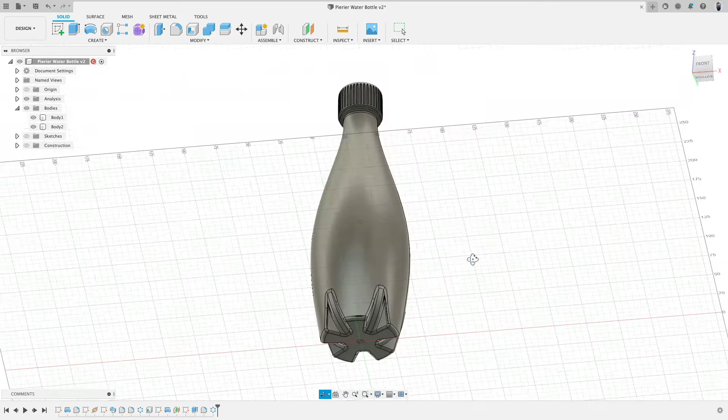So in this video, I will show you how we can create very nice smooth surfaces with the spline tool. And we will use this water bottle as an example. We will also take a look into how to create more details via the circular pattern tool.

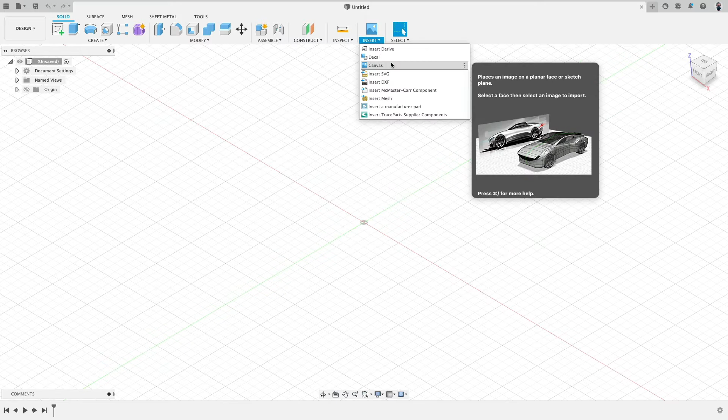Okay, so very good. Let's start with a new file. The first step will be to bring in the scan model. Normally you would go to File, Import, and we don't actually have an import function here. So to import an external CAD model, we actually have to go to the Insert command. Actually makes sense because we have Insert for Canvas, insert two-dimensional drawings, so why not the mesh model? Click it. Very good. Then you navigate to where you have the file and click Open.

The next step is very important. This model was adjusted in Blender, which is my go-to polygon modeler. And Blender internally works in meters. So the unit type when we bring this in should be meter. So then the scale is 1:1 and correct. Okay, very good. So there it is. Our document is also set to millimeters.

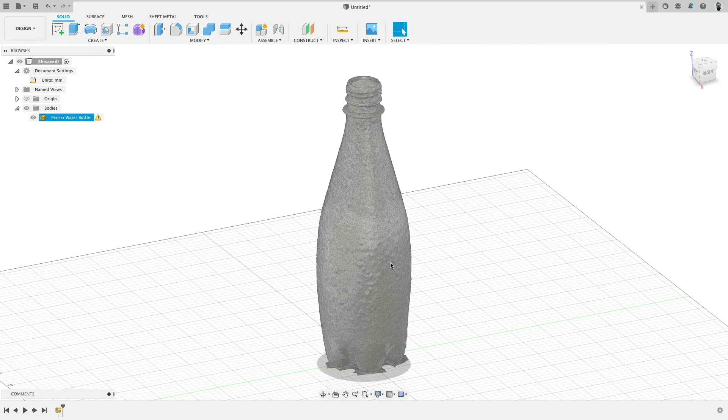If we now rotate around, we can see here there are some dents, some bumps actually on the surface. That is actually cornstarch. I used cornstarch to make this transparent body more opaque, and then used Meshroom to do the photogrammetry to create this model. I rotated it and positioned it so from the front view we have a nice left and right view.

Okay, so how do we start? First, we would like to make this bottle more transparent. So right click onto the mesh body, opacity control 10%. That is good. Now we can actually see through it. As always, we want to start working on the easy parts. This curve is more complex, but here we have a few linear elements: the center, the bottom, the neck.

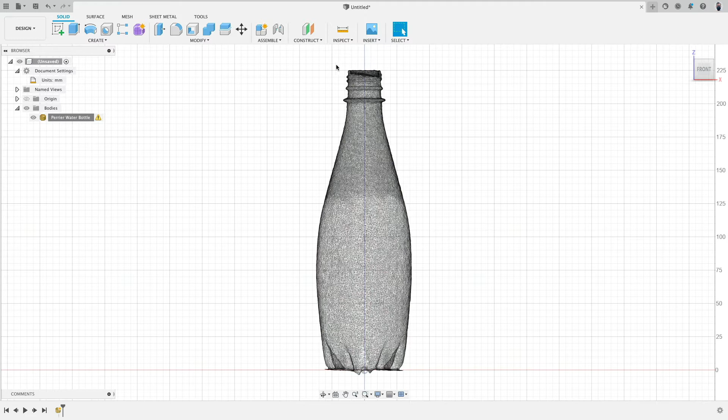So let's do that. Sketch on this plane, line command. I start somewhere here, go over, and then I go here to the ground point, click and go this way. I on purpose make these lines crooked just to show you how the constraint system works to straighten everything up. Horizontal constraint for this, vertical constraint for this. Here we have a perpendicular constraint. I will delete this and replace it with a horizontal constraint.

Dimension wise, now this curve will come down, and then here at the bottom it's rounded. So this line has to be a little bit longer, maybe like this. Let's add a dimension by pressing the D key or going to sketch dimension. 30 is good. This length here, I know it's 225.

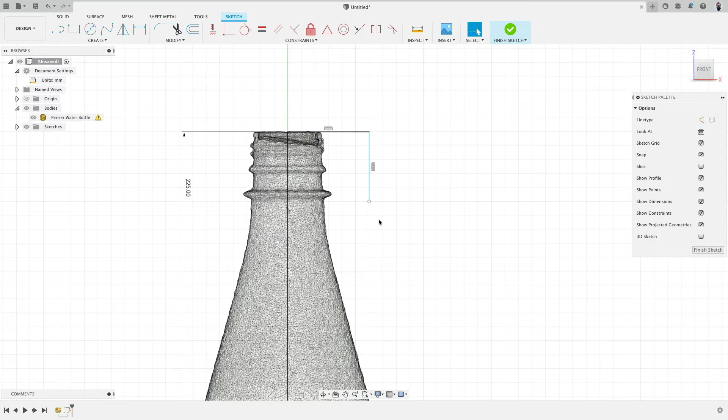And now we can select this point and drag it around and see where this would look good. Maybe here. This feels good based on the scan. Maybe a little bit of tidy up. 12.5. What's the length here? 25. Very good. So now we actually have this part done.

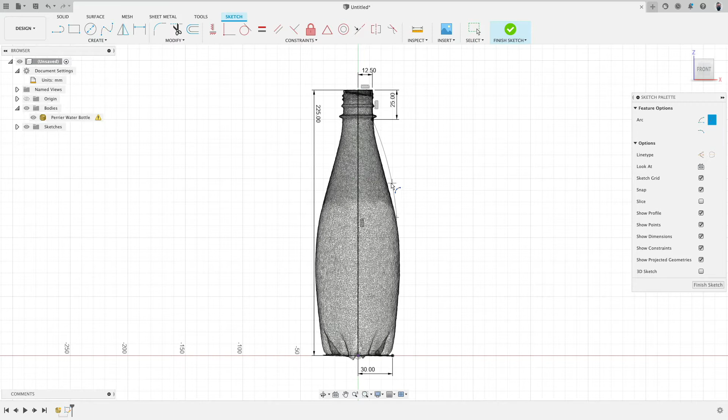Now we can take a look at how we do the curve. There are actually three ways. We could work with many arcs and try to model this till it actually fits. Please don't do this. I'm just making a small quick demo. And you can see, now with 2 arcs, it doesn't really work. I might need more arcs, and I'm really limited to the shape of arcs.

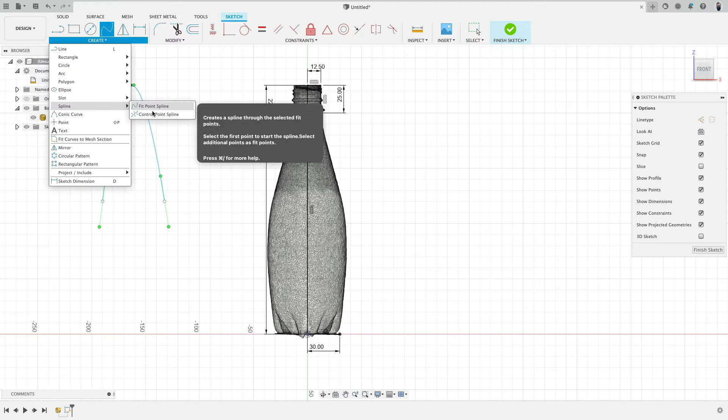So, welcome to splines. We have 2 types, fit point and control point. Let me go over the difference again. With fit point, the curve runs through the points, and with control point, it starts at the first and ends at the last point, and then is inside. By moving this together, I can pinch the curve, and here I have handles which I can use to change the flow.

And they are pretty much 90% the same, with tiny differences in their application. So here, it doesn't matter which one we use. I will show you how to use each one. It's quite interesting. Now, when we take a look at the curve, this is nice and fluid: a little bit linear, bend, a little bit linear. One of the main rules is we want to use the least amount of points. Little demo again. You see how nice and smooth this actually is. I can probably create the same with more points.

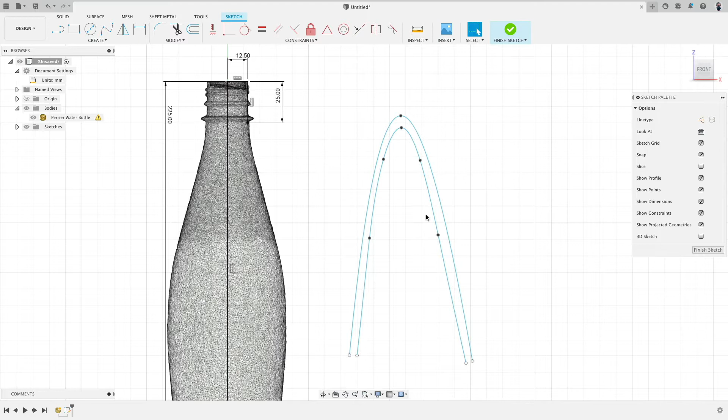And after quite some time trying to clean this up. Now for our eye, maybe they look equal. But check this out, right click Curvature Control. Right click Curvature Control. And I will move the whole curve actually to the right.

So you see when I select this point and move it around or select the handle, this red line is nice and smooth. You see now here, it changes the flow a lot. So when I want to get exactly the same shape like on the right side, you see how much work that is, trying to position all these points.

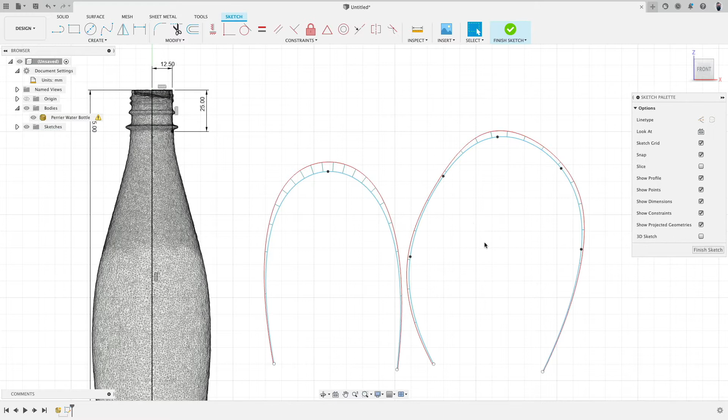That's a good example to show you why it's not good to have many points. It's simply more work to create a perfect flow. When I say perfect flow, for example, here we can see that the surface or the curve changes the direction and gets a little bit flat. But here it's a nice continuous bend.

I always find it very easy to imagine these fit point curves as a piece of plastic, a stick, and we bend it over points. And the plastic always wants to straighten itself. So, fit point curve. We will start at the beginning. Now we need to figure out how many points we need. I will go first actually with 2. And then at the end, click OK.

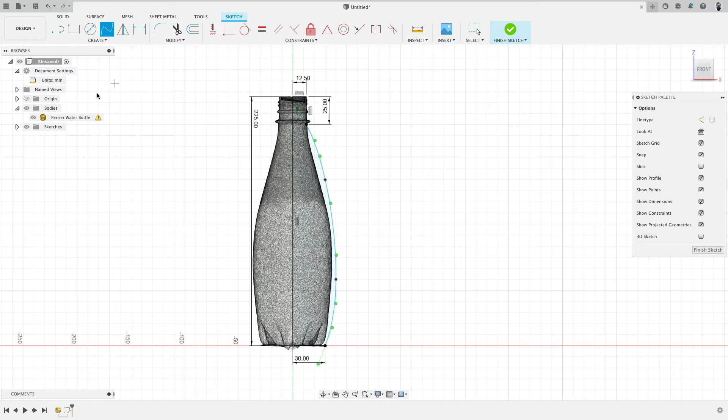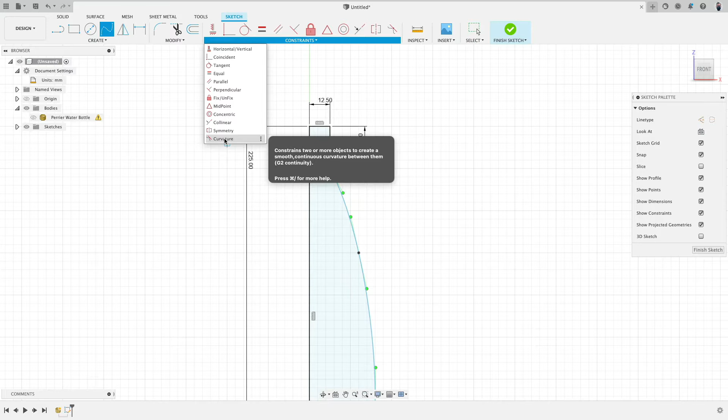So let's hide the water bottle. Down here, this is good how it starts, but up here, I want the curve to flow smoothly into the line. So we have here, it's called curvature. Some programs call this smooth. They also call this create a smooth continuous curvature, or some just simply call it a G2 transition. What G1, G2 means, I will explain in a moment. So this is better than tangent, but a little bit more complicated to use.

Curvature, click, click, and there we are. You see now this basically pulled this handle, so this is aligned and the curve flows perfectly to there. Okay, so escape, so we are not adding any more constraint. And now we can see, when we move these points around, what can we do here? Maybe there. See, push and pull a little bit. This handle maybe a little bit further down.

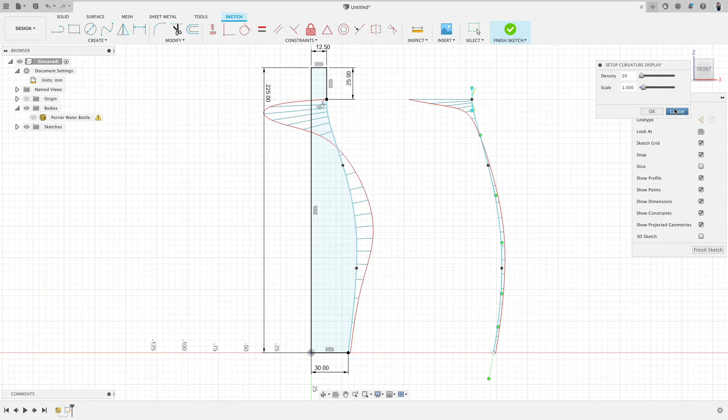When you press the M key, it's actually a lot easier to move these points than by click and drag. Okay, good. So now with this done, let's right click and take a look at the curvature. I will copy and paste and move this curve to the right side, simply so I have a copy. And then here I will turn on the curvature control. Actually, I will cancel this for the moment. And this one, I will turn the curvature control off for the moment.

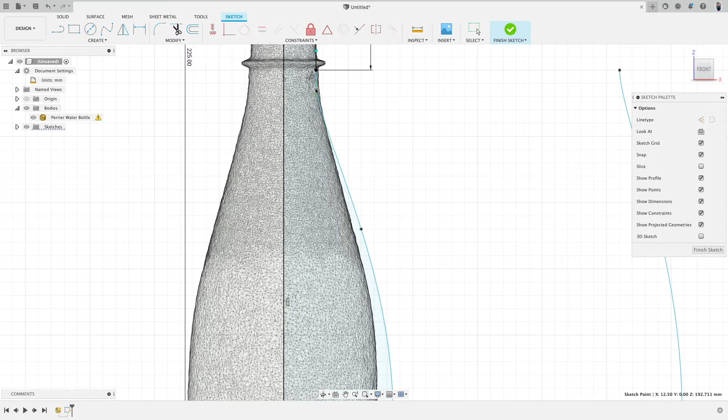So it's easier to see the curve. And now I will delete this point. This goes back to the least amount of points possible, just less work. Let's turn this back on. Okay, so where do we have to put this point? Maybe here. And this one here, maybe a little bit up. I just pressed escape and that stopped the transformation of that point. Yeah, that doesn't look too bad.

So let's take a look at this curvature now. You see how this is a really nice flow. In here where we have multiple points, this changes the flow too much. You see this is very even, and here this is not even. Because just one point.

Goodie. So let's turn this off for the moment, and let's see how close we are. Up here we're a little bit shorter inwards, that's fine. Here maybe we move this a little bit, but then we're not really hitting it there. And here we are off. So we could insert a point, but then we end up back at the problem of too many points. What else can we do?

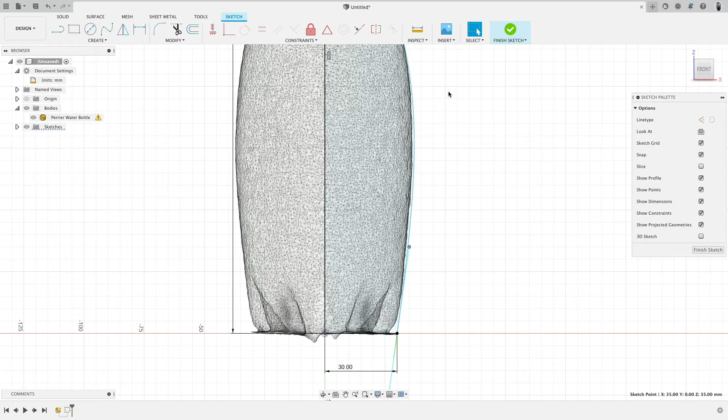When we click this point, we have a handle here. With the handle, I can change the flow. When I make the handle short, I get a small rounded corner. You see there's also a green ring, and if I make this bigger, I kind of straighten that line a little bit more. And maybe like this. And you see this is actually more parallel. This looks all pretty good.

Yeah, here it flows through that curve anyway, through that point. There. Yeah, that's actually pretty nice. So let's take a look at the curvature one more time. So there we are. Okay, goodie.

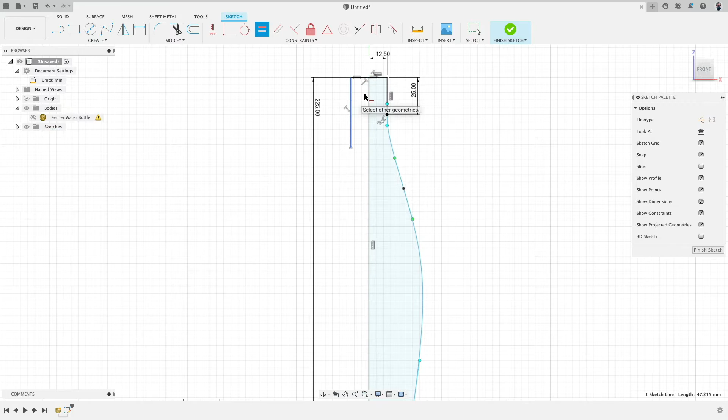I'm going to show you now how we can build this via the CV curve so you can see the opposite. So here I just make two lines, okay, and then I say equal, equal, equal, equal, okay, and I also down here need to make this equal to here. Very good. And then this dimension I push over.

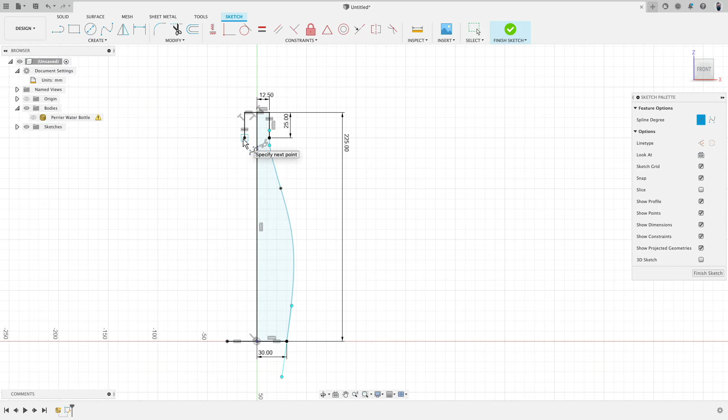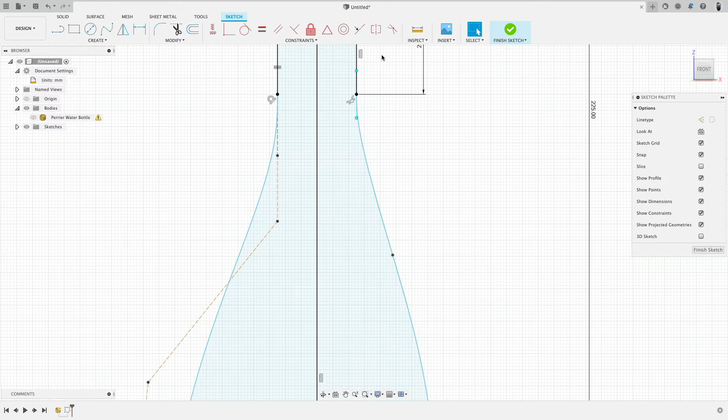Okay. You notice the moment we add this curvature constraint, these two lines will become black. And if I undo this and just do the tangent, only this one line. So what this means is actually that this G2 command, G1, G2, works with these 2 points. So these 2 points are perfectly aligned to this line. You see, they are actually at a line. I will go more into this just in a moment.

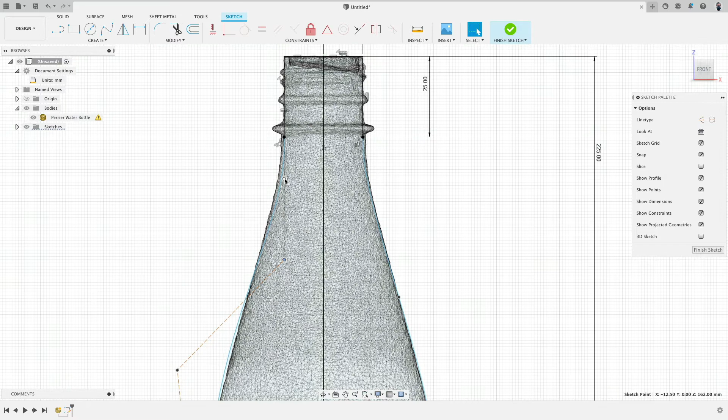Okay, so now we can actually turn on the bottle, and then let's work on how do we push and pull everything here. There we are. Maybe here, maybe a little bit there, and there. So you see here we work without handles, but we simply position the points till we get kind of like the flow we want. Okay, very good.

And what is really important here with the CV curve to know is when we place the CV points, the moment points are closer together, they start pinching, and the more points are away, they're stretching a curve. And ideally, we want also to have them in even distances, which in this case is a little bit more tricky, but the curvature graph here is fine. What this means is the curve starts bending, and then here's an inflection point because the curve changes direction, which is why the graph goes that way. Okay, now this looks actually pretty nice.

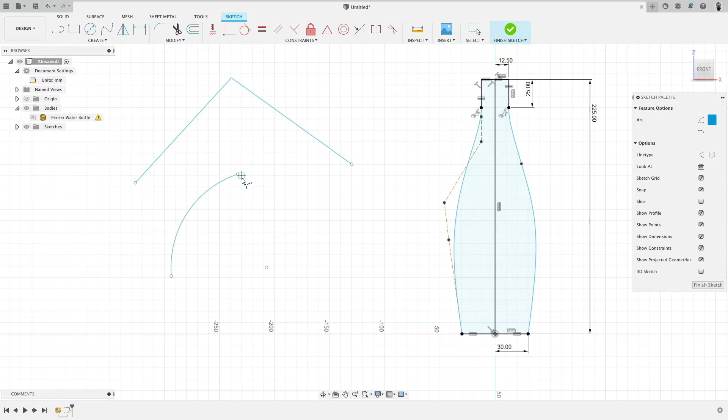So before we continue, let's actually take a look at the difference between curvature and tangent. And again, tangent is G1 and curvature is G2. By the way, coincident is G0. Maybe let's start with coincident. Click, click, click, there. So this is what's called G0 or coincident. There's no flow. Basically, two elements meet at one point very sharply. And the same can also be done with an arc. There and there. You see? Just a sharp point. Okay, so that is G0.

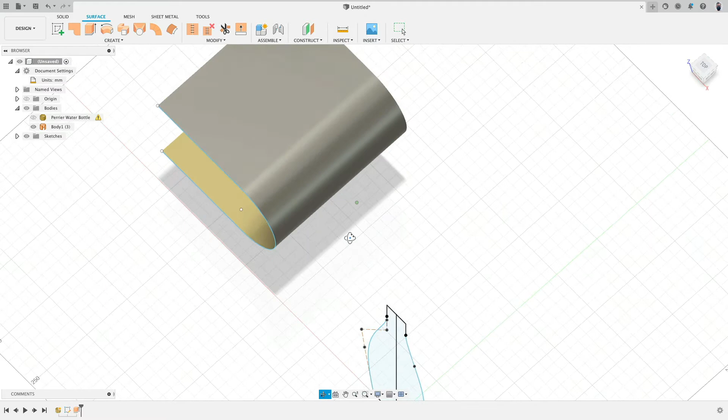Now, G1 tangent. Let's take a look at this. I draw a line and I make an arc and I draw a line. Beautiful. The arc flows tangent into the line, flows tangent into the arc. Okay. Now let's take a look how the surface visually looks when we add lights to it. So let's go to shaded, and there you can see the face is highlighted, and then very instantly the arc gets this highlight, and you can see there is kind of like an edge right there. And that is basically what G1 is. It's a more geometrically perfect transition because it's line and arc, but it visually is just not very appealing.

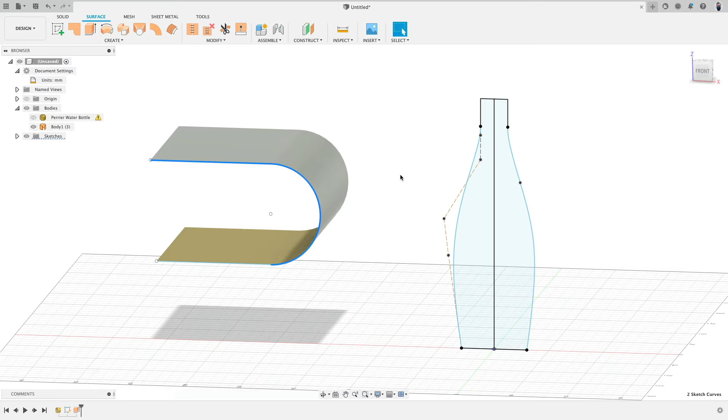Okay, let's go back to the sketch. I will create a line like this, and then I will lock this line on purpose so it doesn't move and it's not horizontal. Perfect. So now I go with the fit point, the CV curve. Again, this is G0, and let's create a transition. Wrong command. There. Now we can see even better how the highlight doesn't even flow because it is a sharp edge.

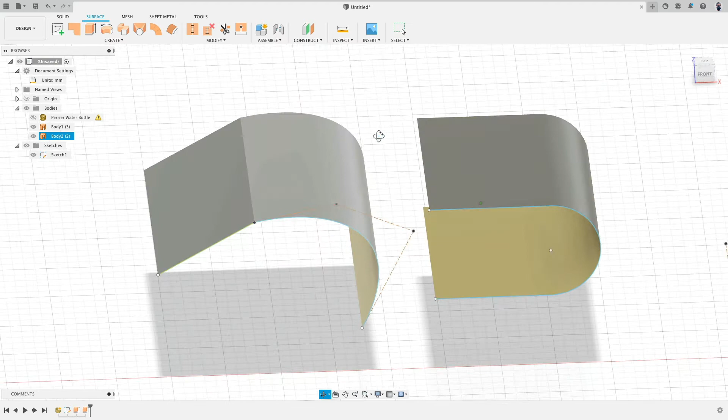Okay. Now when we go back to here and say these two, make tangent. So G1, and pay attention to what happens to this point. You see now that this point got adjusted so it flows to this line.

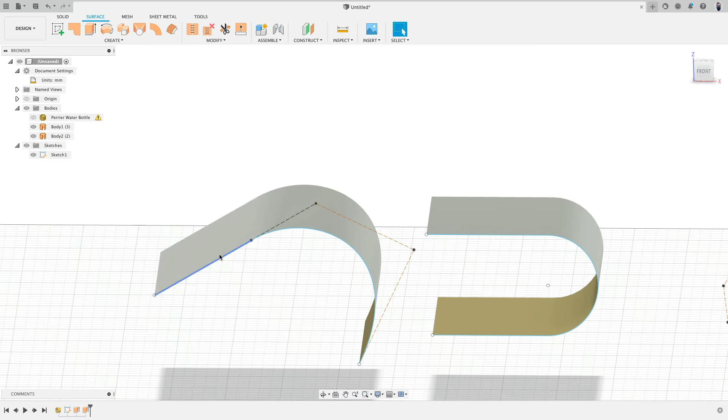There, this looks better, but here we can still see this very quick transition from the big highlight of the surface to the highlight on that arced surface. So we kind of have the same here; while this is not an arc, how this curve flows to here is the same, G1. And essentially what happened is we have this line, and then at this point, instantly this curve starts to bend.

Now we will delete this and we go to curvature. Pay attention to what happens to this point, G2. So G0, G1, G2. You see now this line is parallel also to here. And if we compare how this tangent result looks like, you see from here instantly it bends. Now we can see that the curve actually continues the direction of the line a little bit and then starts to bend.

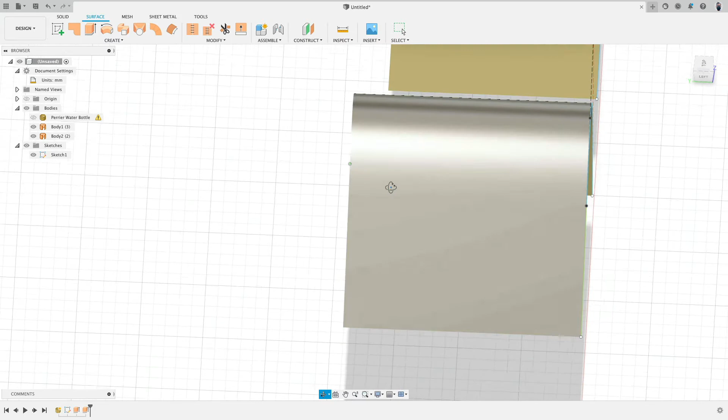Whoa, where's that edge? We don't see it. And that is what G2 is about. And then you also have G3 and G4 and G5. That's more stuff for car designers, but for us, G2 is actually very sufficient. Very good. So here this is a line, and thus these two segments are in a line, or these points are at a line like this.

Let's go back one more time, and I will make something like this, number one. And then, whoops, 1, 2, and 3. Very good. And I will lock these points so they don't move. And I will go G1. You see where this point is, undo. And then G2. You see that this point is actually not in a line anymore. And that is okay. When we move this, you see how the second point moves.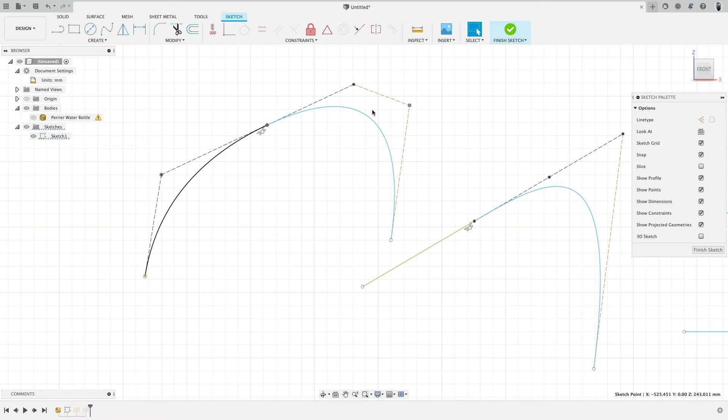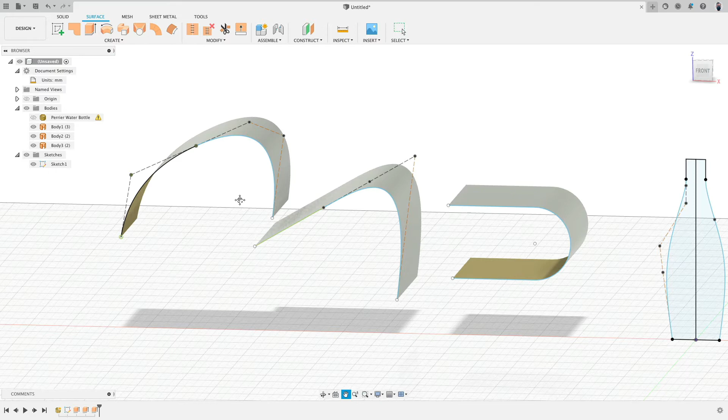So what's happening is this curve has a direction. And with G2 or G1, these points are positioned so that the curve that comes out of it somewhat continues that flow. So when we add also here this, yeah, good luck finding the transition. We don't, because it's perfectly blended. Okay, and that in a nutshell is the difference between G1 and G2. Again, G1 is also faster. G2, while better, is also slower to calculate.

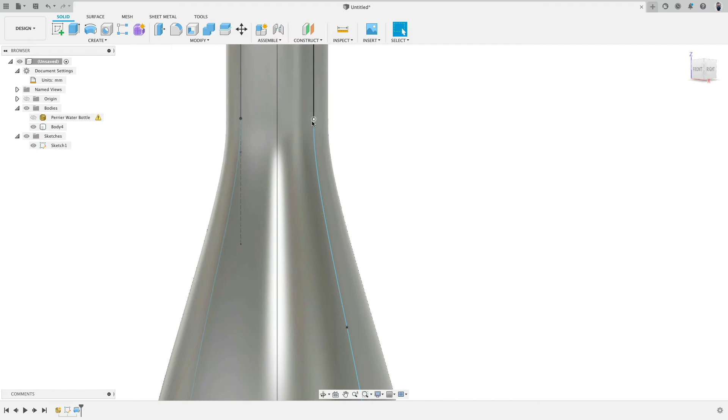So let me delete all this. This is all good. Perfect. Now we can go ahead and create our first body. So let's go to revolve. We'll use this one along here. Very good. Also there, the transition and the highlights are really beautiful. When we zoom in, there's the edge, but we can't see any transition. And that's because this is set to G2. So with the scan model, when we zoom in, we can see there are a few more elements. So we built the main body. Now we can start adding details.

So I will go top down into the sketch. Here's the line command, click, click, click. I do this in a very simplistic way, and then we will push everything into the format. Go to control point spline. Click, click, and then drag this one out. So these are angled because these lines we can also make horizontal and vertical. It's actually pretty cool. And then this line I can drag a little bit higher.

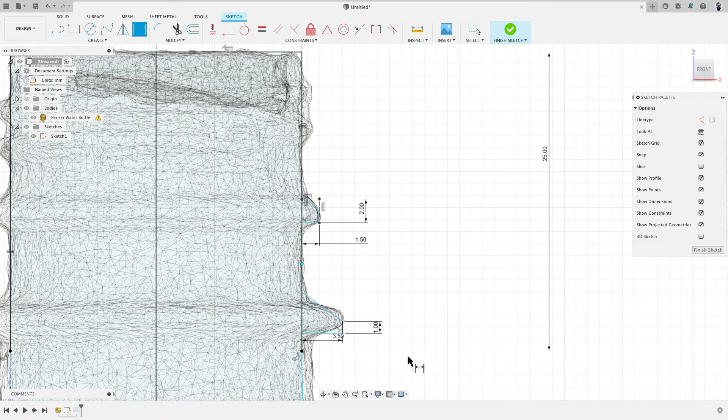So D, what's this dimension? Maybe 1.5. Here, let's say 2. This one we make 1. 3.5 is fine. Now here we could specify an angle, or actually distance from here to here. That would specify the angle of the line. So this line to this point. You have to be careful what you click. And I would like this to be 3.5 millimeters. Very good. From here to there, 1.5.

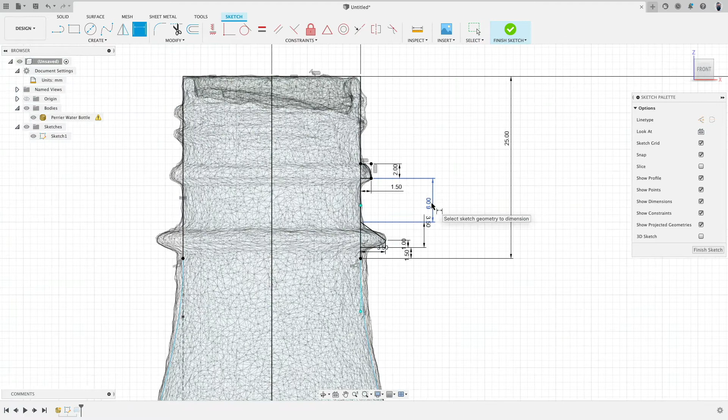And what distance do we have here? 5.5, 6. Let's say 6. Okay, very good. Now, you see we added these extra elements to the sketch, but this is not showing up. So that's a cool part about how we can edit features. Then we click, and on the PC it's Control, on the Mac the Command key, to add more selections or profiles to it. You see I'm deselecting and adding this back. Click OK. Cool.

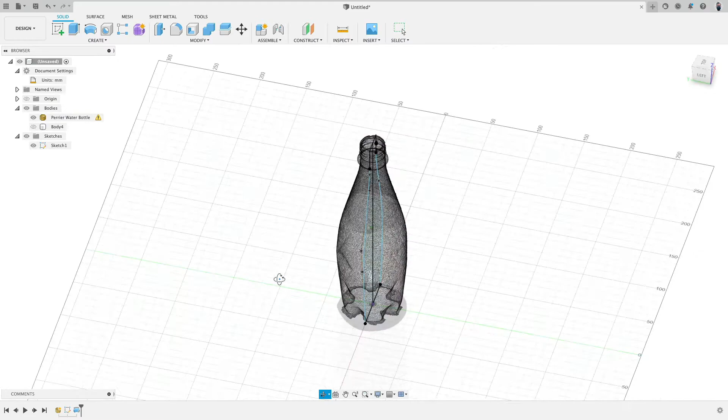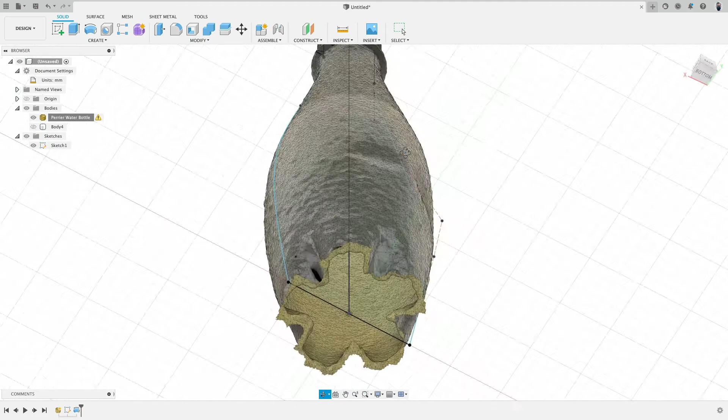At one point we have to hollow this out, but this bottle has these interesting elements down there. So let's take a look at that first. For this, we will go to the model and make it 100% opaque again. And then from the bottom, we need to see where is a good area we could use as a reference. This is back here, so kind of like there. So we go to a right view, then inspect, section analysis, this plane. Very good. So there we can see half of the model right at that position. And let's make a new sketch along this view.

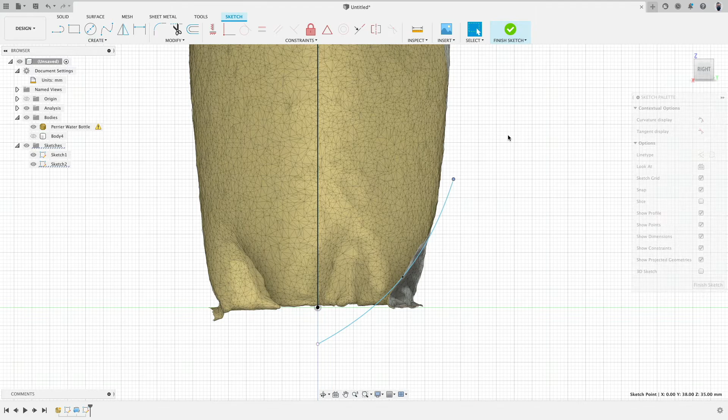Fit point is actually in this case fine. Here, click maybe there. The way this lower area was scanned is not 100% accurate. So this is fine. We just need to get something that's close, kind of like this. Okay, very good. So we specified, and we can turn the section view off. We specified this path. Okay.

Now I need to create the tool that cuts that groove. And for that, I need to have a sketch that I can position onto this line. And like a roller coaster, I want then to run it across here. So we go to construction and let's take a look. There is actually a command plane along path. That's exactly what I want. So click, then I bring it down maybe to here, click OK.

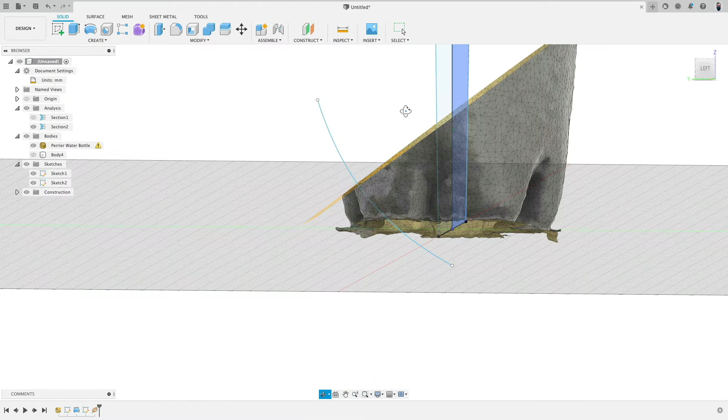And what's really nice is I could go now to inspect, section analysis, click this plane, click OK. And then you can see at this angle, we can look into there. Pretty nice. Back to create a sketch on this plane, because now you can see the sketch we will create is actually kind of having this angle into the body, but it is perpendicular to this center rail.

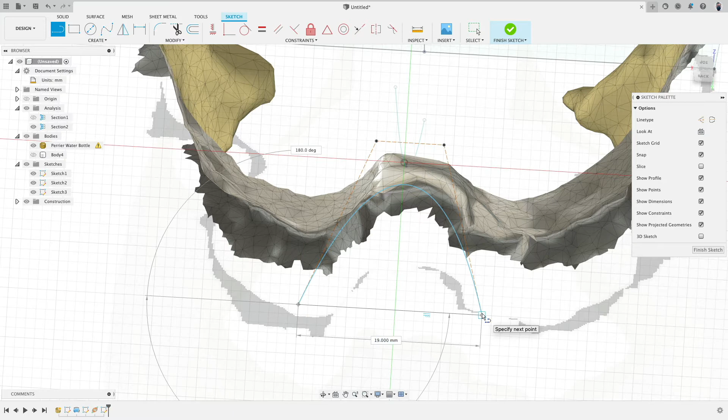And we can use the control point. So I will maybe zoom in a little bit and then click, click, fill this with a line. Okay, and here's now a little trick. I will, ideally on the grid, or actually here, draw a line down, make this horizontal, and then this point I want to be aligned with there. So you see now this is centered.

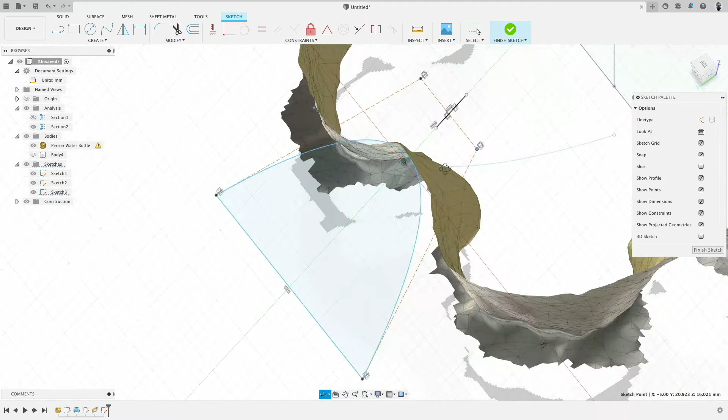This is very important because now, escape, I can select symmetry and say this point to this point, symmetrical to this line, and you symmetrical to there. Very good. Now I can freely just model on one point and you see the other one follows it. Pretty easy. Again, the scan is not perfect, so we just eyeball it. All these exercises we do right now are not made to build something for NASA, but more to understand how this process of modeling works.

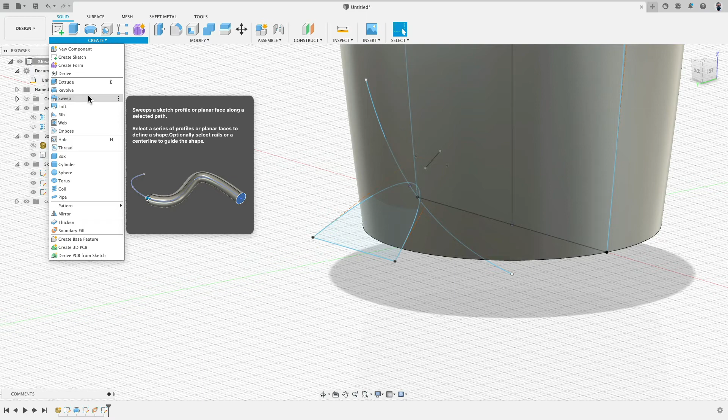So this actually feels pretty good. Then we can turn off this section view. We can turn off this mesh, show our body, and now we will go to create and sweep. Sweep does actually select one profile, the one we created, and sweeps it along a path. You along this path. There we are. Sweet.

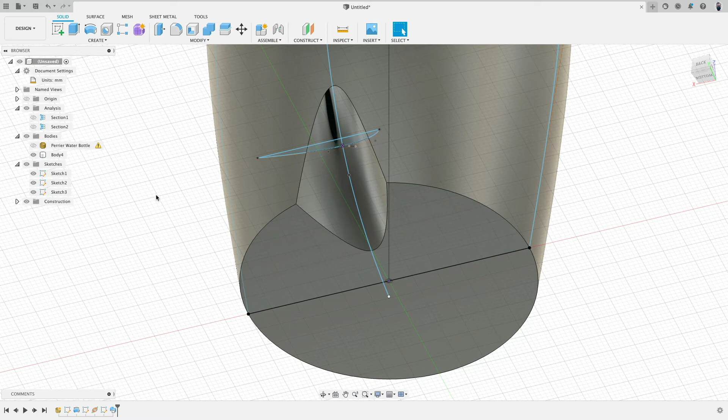Okay. So the nice thing is, again, because this is all timeline based, when we move this point up, undo, you see how everything updates. Beautiful. Very nice. So the next step we're going to do will actually be very interesting for you to see the power of the timeline and how we are going to move features forward and backwards. So now I would like to visualize how this cut works when we make a pattern.

Oh, I do not really like this line here. So why do we have this line? That's because there's a sketch. So we'll do the following: right click, edit feature, and then I just move this to the end. And then from there it starts cutting. Yeah, 10 times better. Cleaner surface, always desirable. To make the pattern, circular array, face along this axis, and okay.

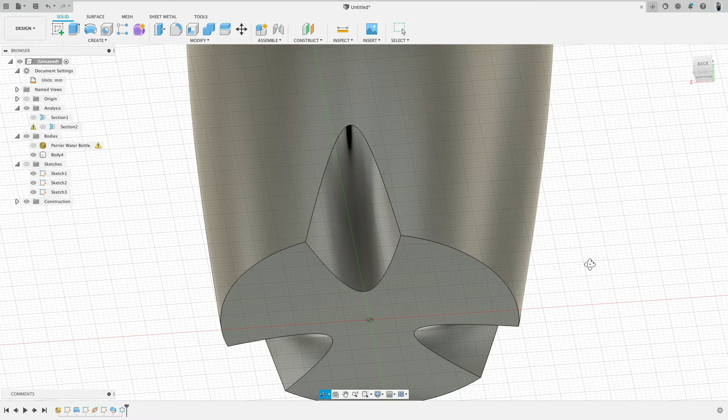Okay, why did this work? I assumed this is not going to work. Interesting. Oh, I got fusioned. Interesting that it did that. I did not know that this actually works. Okay.

Good. So with face, you can make a pattern of a face. With body, obviously you make a pattern of a body. And with feature, that's actually the one I wanted to show you. We now click on this command. That's the feature. And then quantity 5 and okay. There we are.

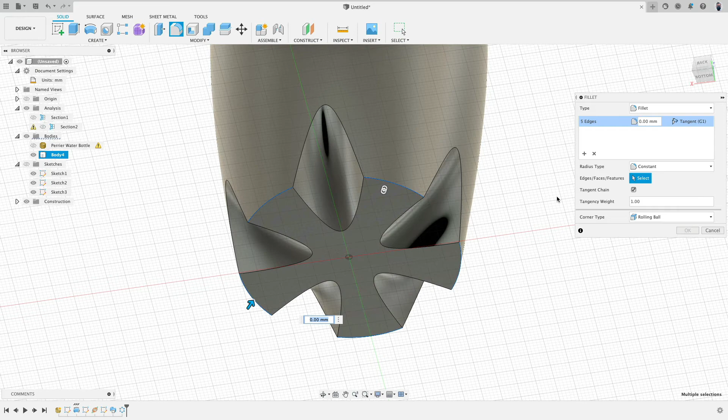Now I would like to round this edge. So you, and you. This looks actually really good. I can round those, maybe 5 millimeters. And then I can go ahead and round all those. And maybe 1, let's see, 2. Because this is a constant radius, you see here how this gets smaller. If we go with chord, this will look visually better. Okay, nice. Good.

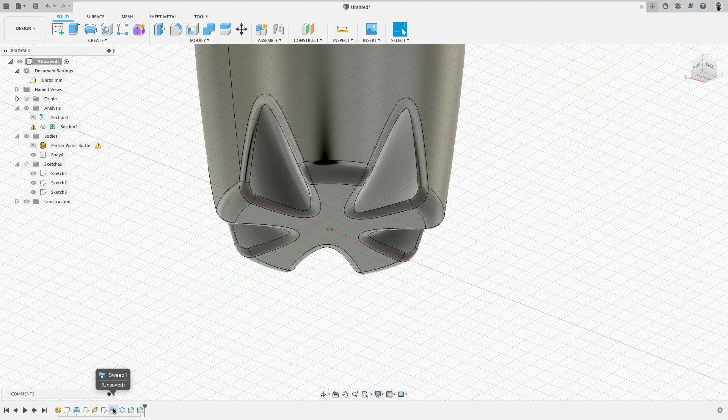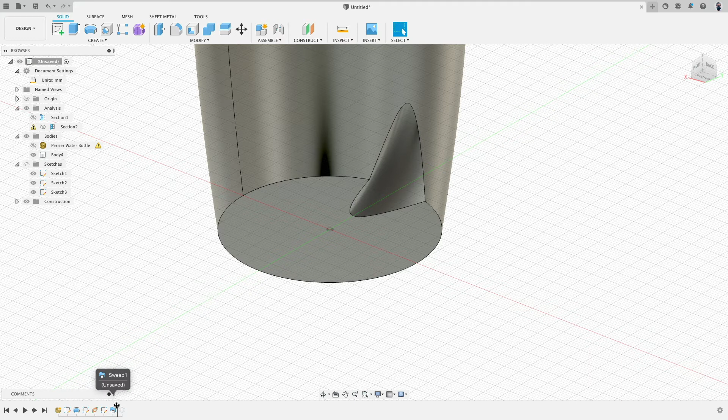Talking about the timeline and how we can move features around. So you saw how I did this pattern and then I started adding these features to it. And maybe I don't want to have to select 5 edges. I just want to select 1 edge. So that means this rounding I need to do before I do the pattern and actually before I even do this cut. And to be more clean, maybe I should do this even before I start modeling on this part. So now there, I will actually give this a rounding at the bottom.

You see how I moved the time marker to the position where I wanted that to do, and everything else should work perfectly. You see, there, now I have this edge already. Because now I can go ahead and say chord length, yeah, that is good. Round, very nice.

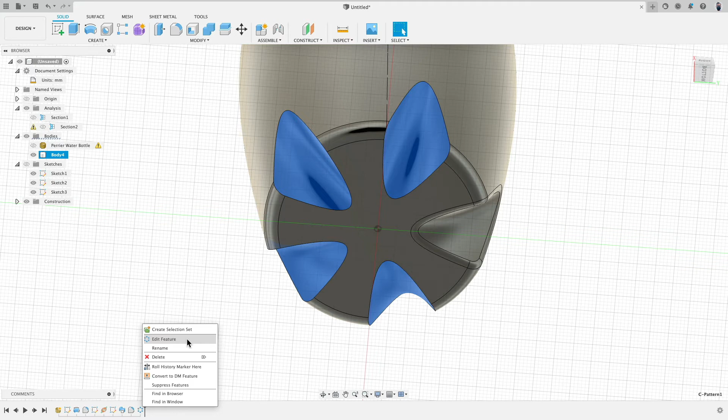Feature pattern, okay. Double click, right click, edit. And then for the features, I also, with Control or Apple key, add this one to it. There we are. Pretty cool, no? So you see how useful the timeline is to restructure our approach to the design. And also at the beginning, we made the bottle and then we went back into adjusting the sketch to add all these elements. And then we edited the revolve feature. Pretty cool.

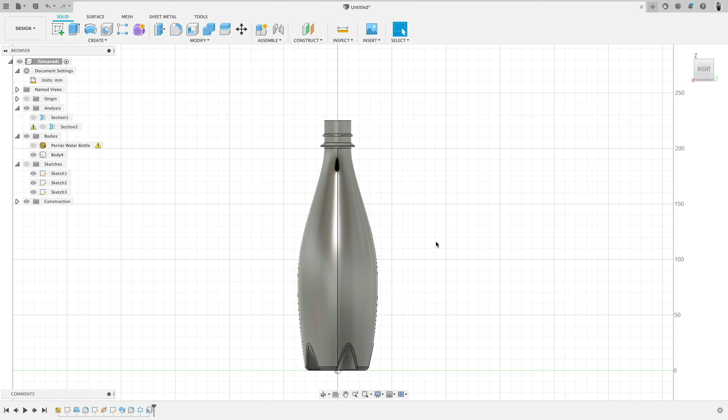Now at this point, we can actually look into doing a shell command. 1 millimeter. This is probably not going to work well, and you will see just in a moment why. So let's do a section analysis from this view. Okay. Well, what's he talking about? This is all pretty good. Let's go up. Oh, what's here? We have cavities. Yeah, that's not good. So how could we fix this?

We could make this shell command simply thicker, 2 millimeters. And we get an error warning? Yeah, there was an error warning. Okay, maybe 1.5. Let's see. Shell, by the way, big warning, is a very tricky command because it is a very complicated task to offset the exterior surfaces into a shelled inside surface. So here we have some problems, so we can't even do this.

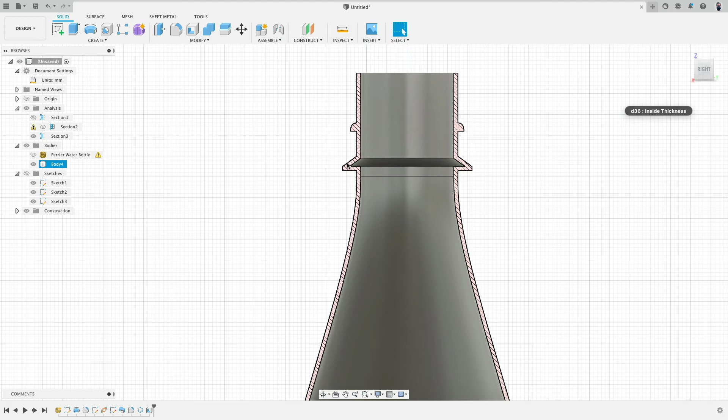And I want to maintain having actually here this being filled. So what can I do here? Okay, so this area gets shelled. To prevent it being shelled, I simply have to go back to here, edit feature. I will actually turn the section off, show my sketch. Here, hold the Apple command or control key, and to be clean, I deselect these two elements. Okay. Do the shelling. There we are.

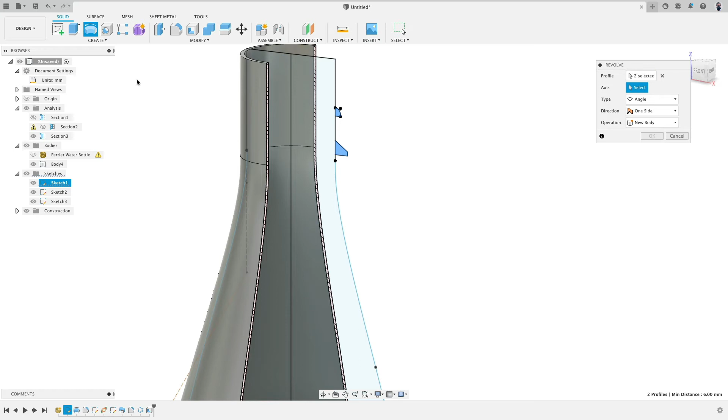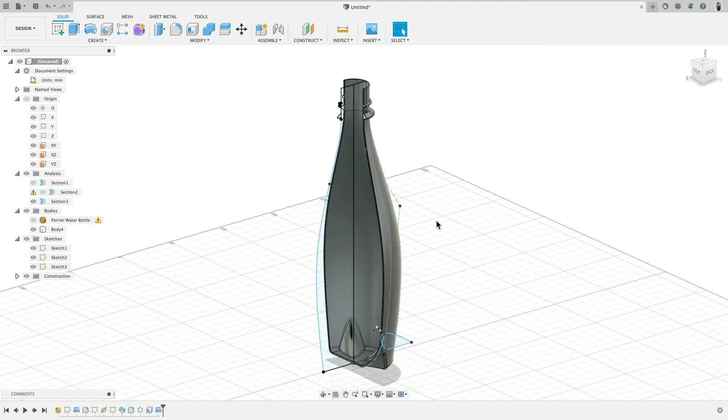You see? Pretty cool. And now after we did the shelling, I'm going to add these two bodies back into our design. I'm using this Z-axis here. Join. Cool. Okay, so you see how we brought these pieces back to the end. This is really why I like the timeline a lot, because it is a very easy tool to visualize how we build everything, and then we move features or steps forward and backwards. Because when you explore design, you have an idea, but definitely there will be times where you have to adjust your idea.

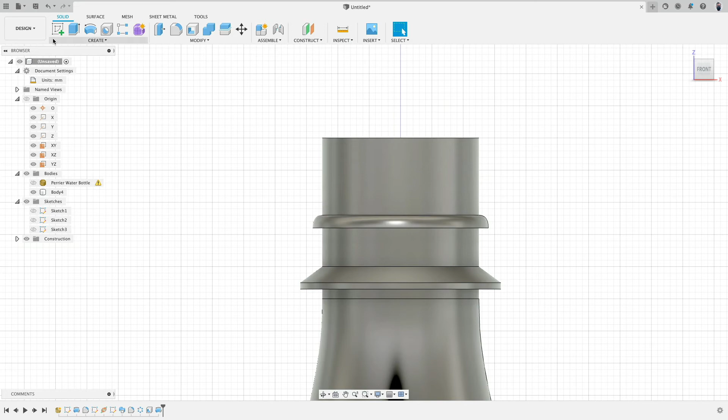We have a lot of section views, too many. Let's maybe remove some. And this is all good. We could give those names to make this cleaner. Actually, yeah, so let's go to a front view. The last thing now we would like to model is actually the cap. So I will turn the sketch off. I will make a new sketch on this plane. Very nice.

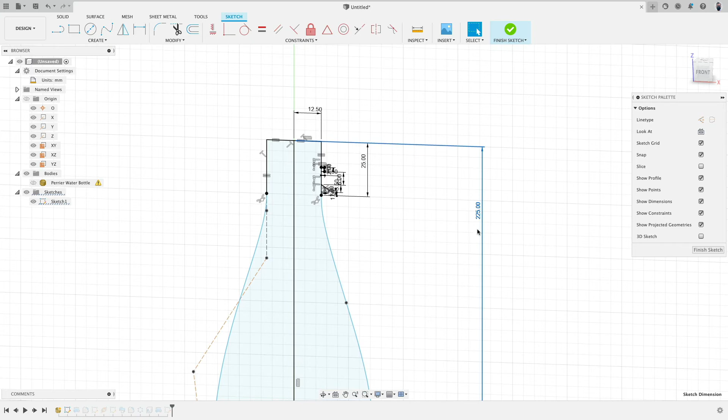And then I will, yeah, how do I find this point? Let me show you another really interesting trick. So we could project this line in. So from the model to there I now have actually this line. And then from this line, I can continue modeling the cap that goes over it. Super easy. Okay. Let's delete this. I could also, when I actually go into this first sketch, see, oh, this is 225 millimeters. Okay, good.

So that means in this sketch, I make this big on purpose so you see where it is. Draw something here on this Y line, and then I need to make sure these two are vertically constrained. So they go up and down, but not left and right. So with Shift, select these 2 points, dimension 225. Yeah, you see? Okay, but what happens now if we go to sketch 1 and adjust it? That's not necessarily good. Then we have to go back to sketch 4 and figure this out.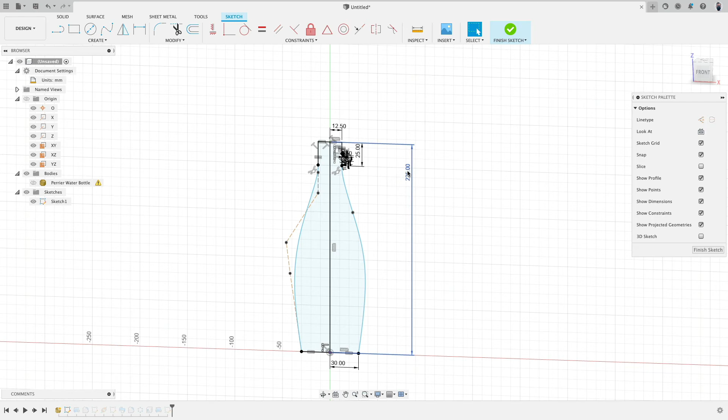And let's go to here, and I move my mouse over here, and you see it says D2. This is dimension 2. This is dimension 4, dimension 3, dimension 1. Okay, so all these dimensions we add have an ID number. Let's take a look at change parameters. Welcome to spreadsheets. Look, linear dimension. And there's actually 225. So we could call this bottle height. Okay, good.

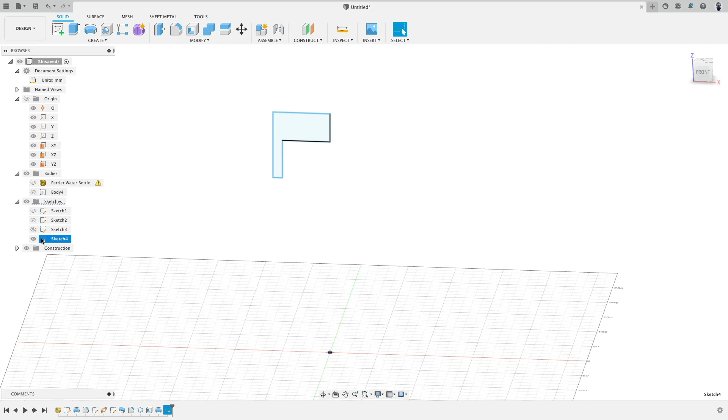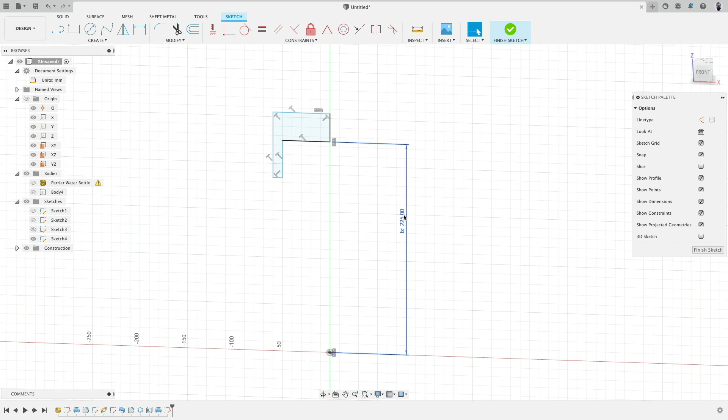And if I go now to sketch 4, go to this dimension 38, double click, and then here I type in bottle height. And you see now the red text turns into black because Fusion found that there's actually an ID with that name. If I press enter, now it says function 225. Pretty cool, huh? So let's go to change parameters and we say, make this one maybe 240.

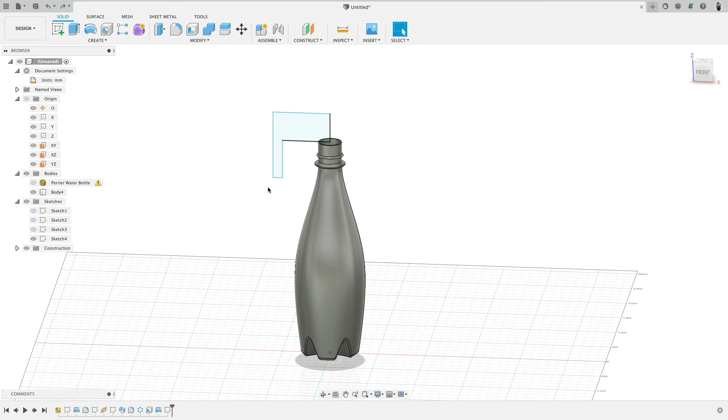And you see, this is 240. It got adjusted. I just undo and go forward. So we were actually linking this. So this is another way how we can link dimensions. This is only as an introduction so you understand and get an idea of the possibilities of what parametric modeling means.

So I also know that in sketch 1, for example, this is 12. So this is D3, now you see D3. Let's go back to here. There's a dimension, and there we say D3. Okay, but now it's exactly added. That's plain, but we would like to have a small tolerance for the threading. So we could say the value of dimension 3 plus, we are in millimeters in this document, plus 2. Enter. Isn't that cool? Yeah, I think so.

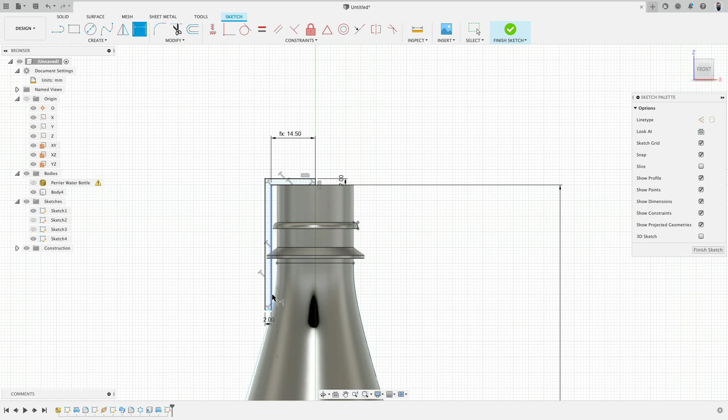Okay, and this one here, 2 millimeters and 2 millimeters. This is actually way too deep. So yeah, maybe there. So what's the dimension? 20. Very nice. Escape. And then this line and this line we will delete. And go to create, control point. Click, click, click, click, and click. Very nice. So horizontal, horizontal, vertical, vertical.

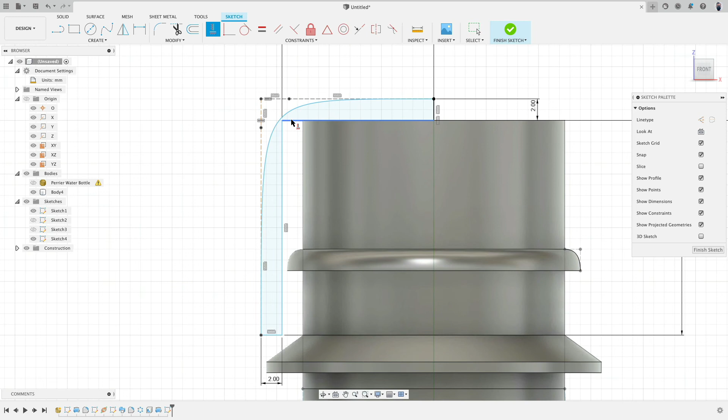And because I made those equal, I can just move one point and the other one moves because they're all vertical, horizontal constrained. I can just move my mouse left and right, up and down, and I'm not distorting the sketch. And with this CV curve, you can see here, this is a really long line. So I'm stretching the curve, and then here I get 3 points together, and I'm pinching the curve, and then it goes back down. Pretty nice, no?

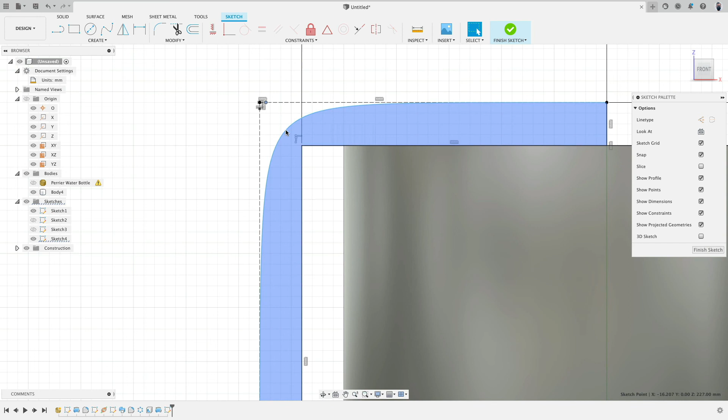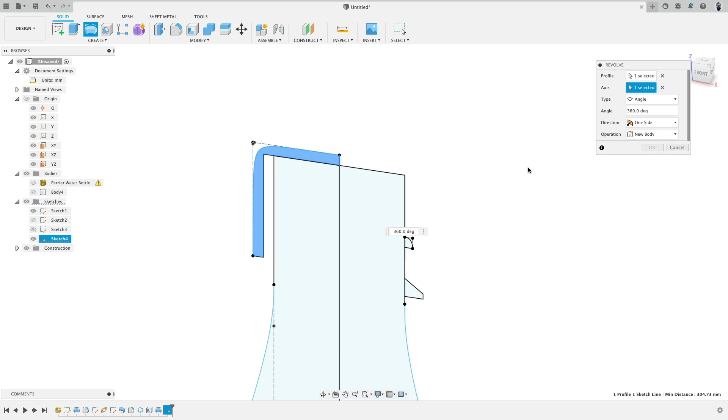Obviously, this is getting very tight. We could later round this a little bit to build up material. For what we do here right now, this is fine. Good. So there's our cap. We want to maybe hide this and then profile and axis. Very good. Let's take a look. Yeah, this is fine.

And I would like to have some details there. So I want to draw something on top. I need to have a sketch on top. So offset plane. From here, go up by maybe 230, let's say 240. Okay. New sketch on this top view, zoom in, and I will go somewhere else so it's out of our way. Here I can see where the edge of the cap is.

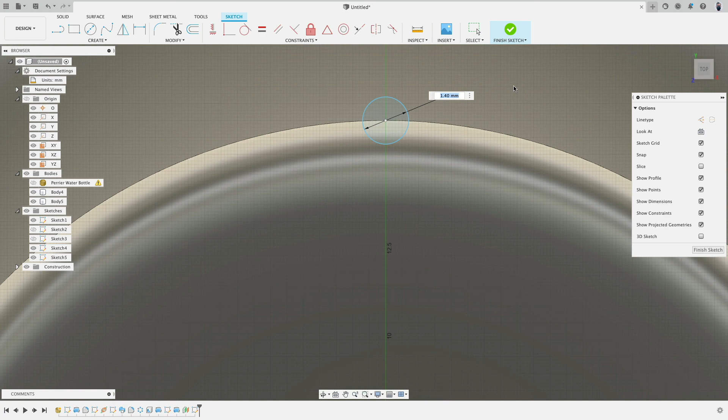Maybe I go with 1.5. I pressed D for the dimension tool, 1.5, and then vertically constraint, and D, I could also specify the distance, 16.5. That's the radius of the outside of the cap. Okay, so because I made this ring, I can now go to extrude and extrude this one down. And you see when it cuts through, it does a cut. Pretty nice, no? Yeah. Okay.

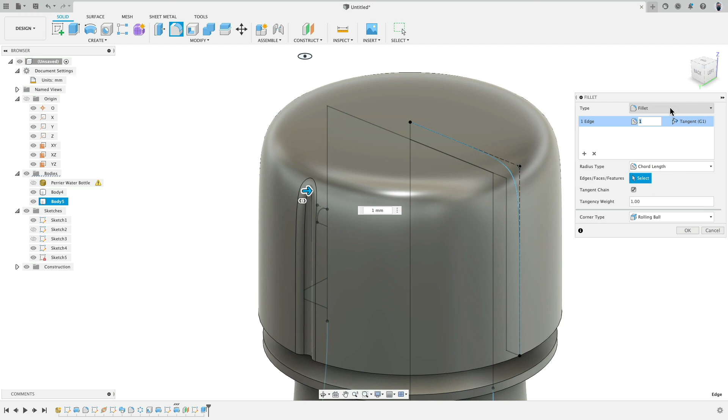Then fillet. U. Chord is fine. 1 millimeter. Yeah, it's maybe actually a lot. 0.5. Okay. Again, with the chord, we get a really nice consistent thickness because you see here the surface arcs. So technically speaking, this would get thinner. But visually, this looks better this way.

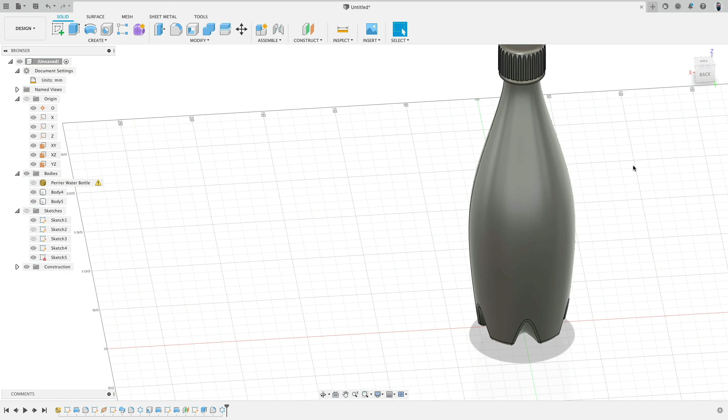Nothing is more annoying than when your wife with Superwoman power grip screws the caps on so hard that I get frustrated when I have to give back all the bottles at the bottle return. I need to unscrew all the caps. Yeah, that's what you put up with when you get married. But I love her. Very good.

Sweet. So I would say we have a really nice design that's shelled. We have some cool details here. We learned how to use the spline and the CV curve with the curvature control to create really nice fluid shapes.